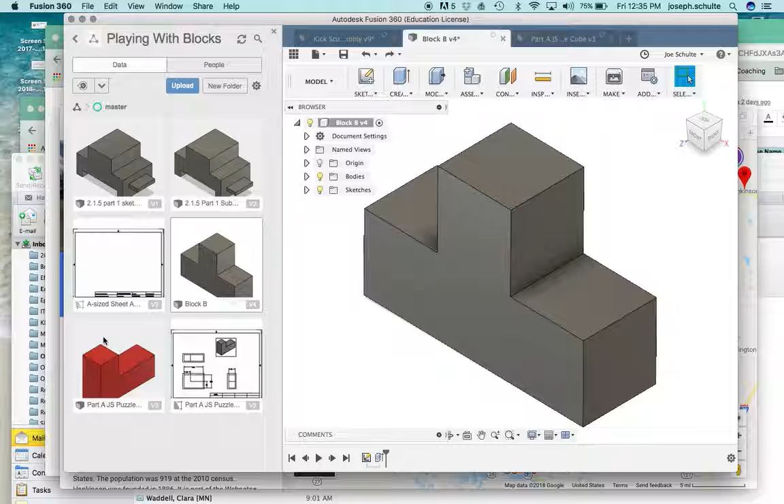You're going to right click on a second part in the library and choose Insert into Current Design. It's going to bring that part in, and when it does, it gives you the Move Copy function, which is M on the keyboard at any time.

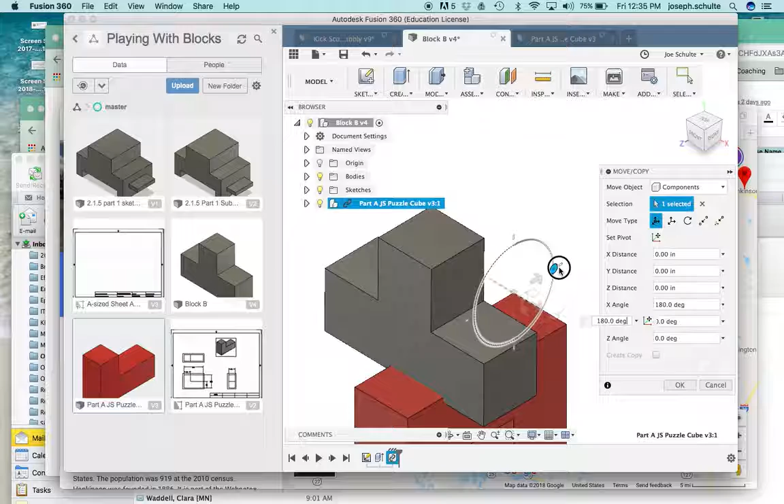In order to move this thing, you want to select the sphere in the center, this small little snowball here, and that will allow you to move it close enough and get it adjusted properly. Now I want mine flipped 180, so I'm going to grab this handle for the rotation feature and rotate it around 180 degrees. Then I'm going to grab my snowball again and move it to get it close. Move Copy, you can get out of the way for a little bit.

It doesn't have to be exact, and I actually want some space or a gap in between these. Once I've got it close to positioned correctly, it's going to slide in here and lap over the top of this T. Then I can click OK.

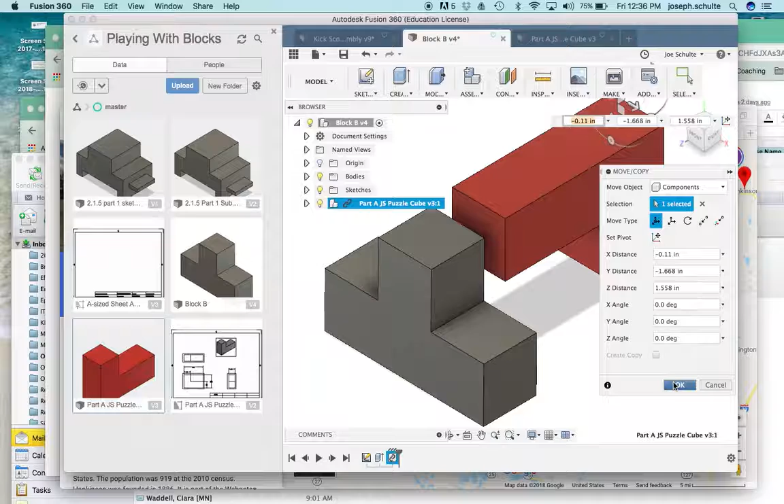I'm going to hit J on my keyboard, or I could find that under Assemble and choose Joint, and that's going to give me the joint window.

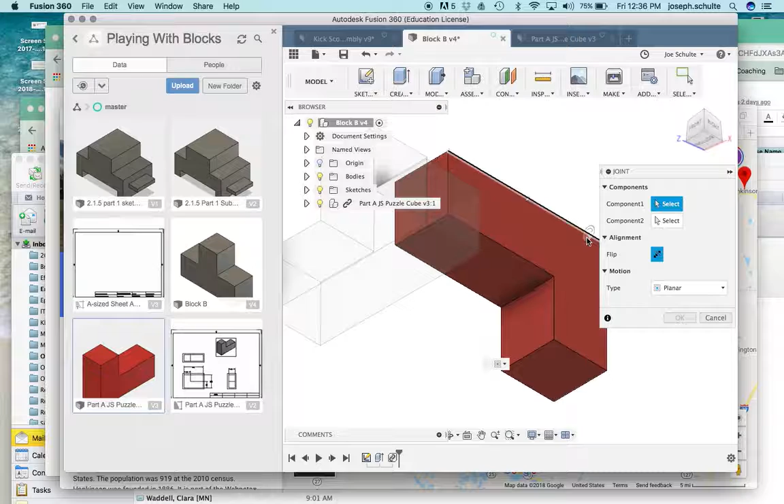Normally I would tell you it's asking us to select components, and I would say select this face and then mate it with the face on the back side. But it's actually a little more effective to select objects that are the same profile and shape. So I'm going to select this inside edge right here and the center of it. Notice how that snaps to center.

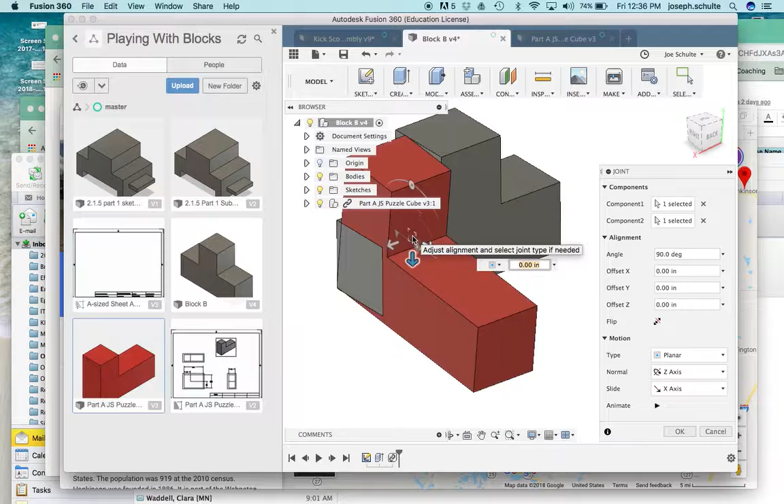So that's my first object, and once I click that, it asks what you want for component 2. I can use the view cube to rotate around and get an angle where I can see component 2. Midpoint of that line, click, and it's going to slap those two together in a fancy form, automatically making it flush on this outside edge and on top as well.

So I just need to confirm that, click OK, and then I would go ahead and find my next puzzle cube part, right click on that, and insert it into the current design.

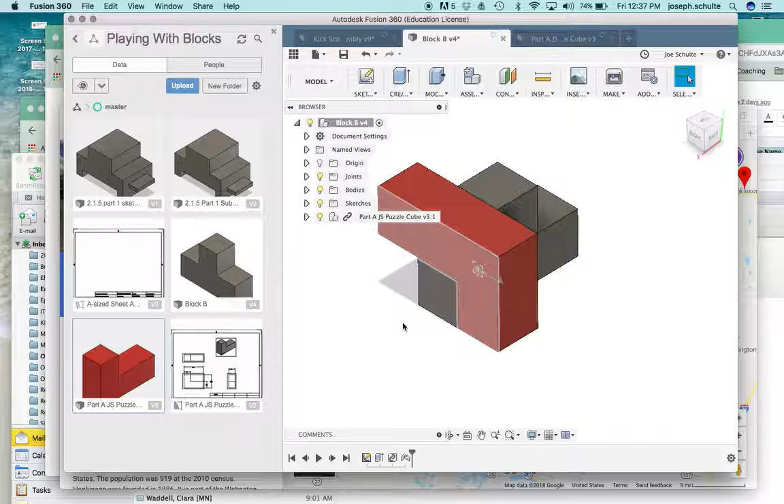A few things if you get stuck or a constraint doesn't work out. Notice we've got a revolute function for some reason in here, I don't exactly know why. It might be on that axis point, so I could have set a degree constraint to that, which is kind of cool. But the program is really smart to know you just want to flush up these edges here and flush up the top edges and mate these two together.

If I got in trouble though, I could go back into that joint command right here. Notice this would be my angle offset, and let's just try 1 inch and see what it does. So it drops it down 1 inch from there. That's kind of cool. I'll take that off.

But I could also go, let's try that again, 0 degree... I think, there we go, 90 degree. If I change that to 180, it's going to spin that piece based on my axis. And you notice I've got this kind of double faded thing, well, that one block chunk is inside the other one. If I type in 270, you can see it spun it all the way around.

Here's 90, it's backwards of what I need. I've got to go back to, must be continue to spin from that or add it up. 270 is correct right now, 0 inch offset from those 2 points. And I could also flip it if I needed to, it would invert it, but it's the correct direction right now.

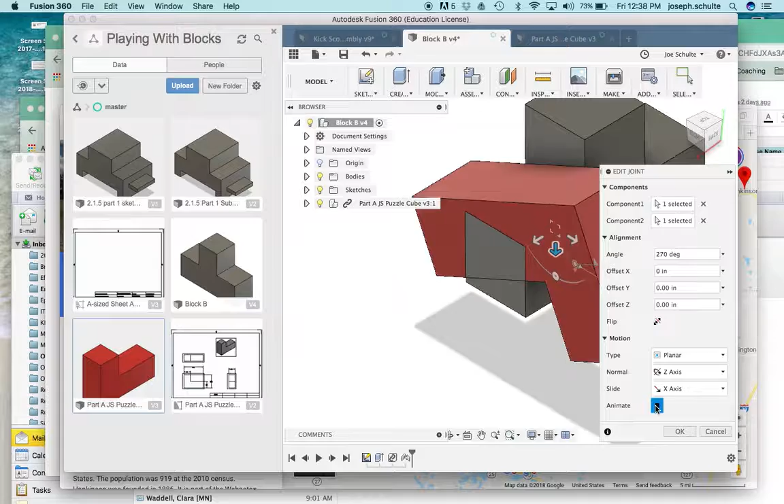Animate, well that's fun, must just be able to animate it multiple times. Wow, okay, stop, thank you. And that should... that's not good.

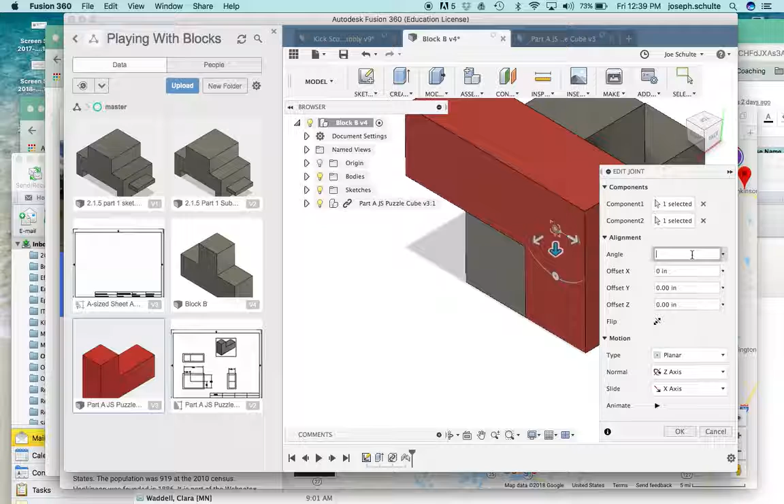So I have to go back in and fix this thing. That 270 must be messing it up. I think it should be 90. There we go, it's what it was originally. So I'm good right now.

I would save this, and it's going to be my completed assembly at some point. Then block B would really become my assembly, and I would create my exploded presentation view out of block B.